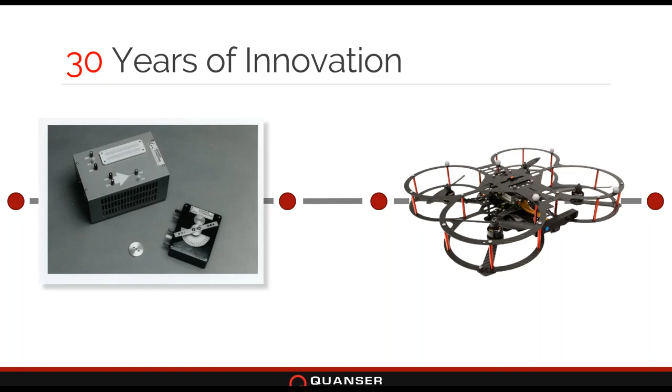One thing I'll also touch on, which we've done over the years and are continuing to do with this product I'll talk about today, is to create systems that take cutting edge technology and really integrate them into solutions that are academically appropriate. So taking whatever it is that industry is pushing, or that even students are pushing, as the next shining light of technology and innovation, and trying to adapt that to the academic field to allow educators to give students the skills they need to use those technologies.

So as I said, many years in academia, we're now closing in on, I think, probably at least 3,000 academic institutions that use our systems around the world. And on our website, we have thousands and thousands of academic papers in research that we've qualified and gathered up that you can search and look through to see how our solutions have addressed your particular fields of interest.

But that being said, there are many more out there. These are just the ones that have come across our desktops, and we have 80 plus core products and solutions. So what we're going to show today is just a little snippet of some of the solutions that we offer, and some representations of the solutions that we offer. But we offer, beyond that, a wide range of products, not just in controls and robotics, which is what we're talking about today, but also in structural health and other types of systems that run the gamut of engineering.

And with that, we'll get right into the final introduction to what we do as a company, which is the Quanser approach. So these are the tenets of what we try to offer with any product, whether it's this type of innovative platform or even just our day-to-day hardware offerings.

We try to make our hardware platforms robust and expandable. I'll say that applies to software and to the solutions that you'll see here, whether it's virtual or real hardware, it's still expandable and it's still robust. And open and transparent - there's nothing hidden away in everything that we do.

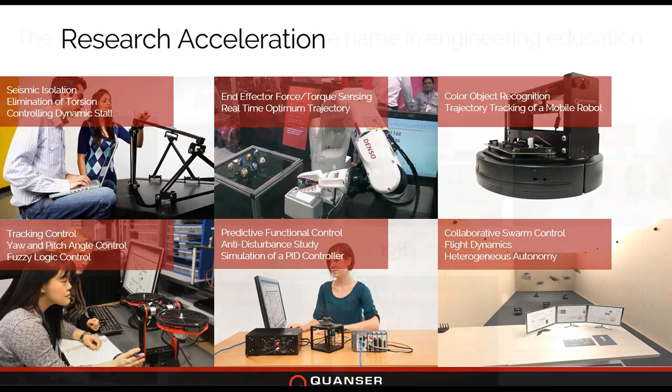One last thing we'll touch on is research. Research is where we started. Everything we do starts with our own internal R&D research. That's why we call our team the R&D team, because before we can present something academically appropriate and ready to use as a teaching tool, we have to do a lot of research to understand it and create something robust, reliable, with the needed capabilities, while offering flexibility so different institutions can use it. These are just some examples of institutions we've partnered with to showcase academically progressive solutions addressing growing needs in the academic field. That doesn't come without a lot of R&D into how we can address not just the technology, but also the needs of students and the academic community.

And now I'll pivot to our legacy in distance education, which is the topic of the day, and obviously the topic of the day for a lot of different groups and organizations around the world.

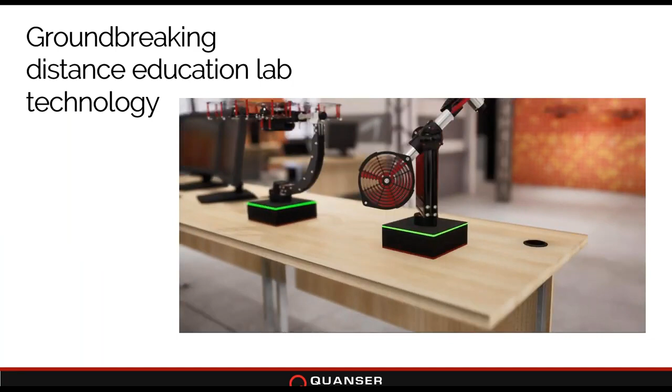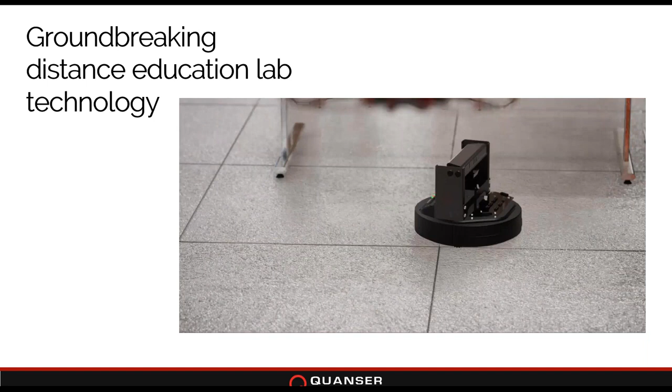This is an example of the technology we've been working on for several years. This is a laboratory experience students could have where they don't just see a video of our systems, but an open environment where they can roam around and see things. We've used this technology to do demonstrations showing how our systems can be used in ambitious ways. But this was basically the furthest we had taken this platform—being able to leverage virtual reality, augmented reality, and mixed reality to showcase our systems. We'd never actually created solutions based around this.

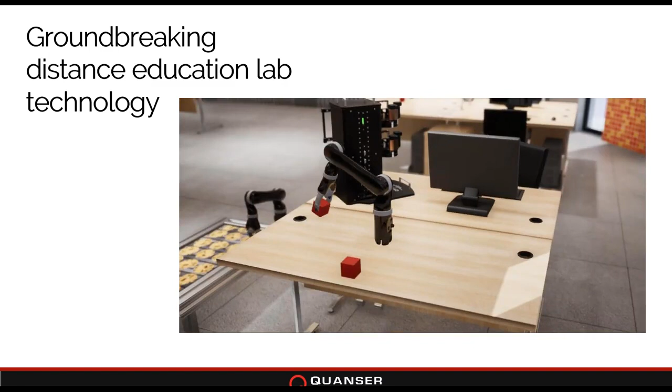That was one of the technologies we pulled on for the solution I'll introduce in a couple of minutes. The other was this platform, qdex, which we've been working on for 6 or 7 years. It took the curriculum side—really interactive, engaging curriculum for students on mobile devices, where they live and breathe. That's where students consume content nowadays. This platform was robust and intuitive, letting students take complex engineering topics and engage with them in a very intuitive way on their mobile devices, whether on the metro, on a plane, walking to class, or in class.

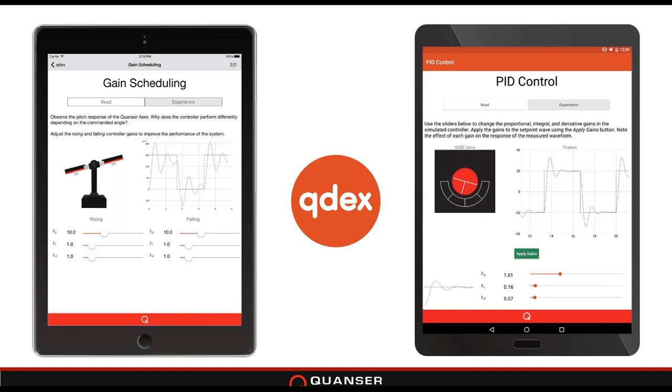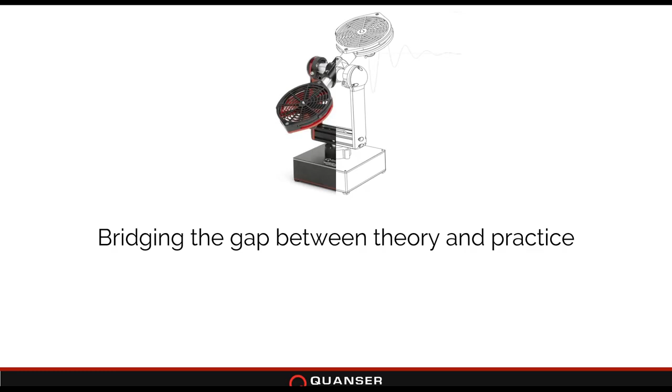So the question was, how do we take those two platforms and create a solution that does what we've always done with our systems through this cutting-edge content delivery mechanism: bridge the gap between theory and practice. How do we keep the theory—we don't want to iron over it or remove it—but also show applications. My team is very passionate about this. Every one of our curriculum topics starts with a motivation section to engage students and show them the point of these concepts, why we're teaching them, and why they're important for the future.

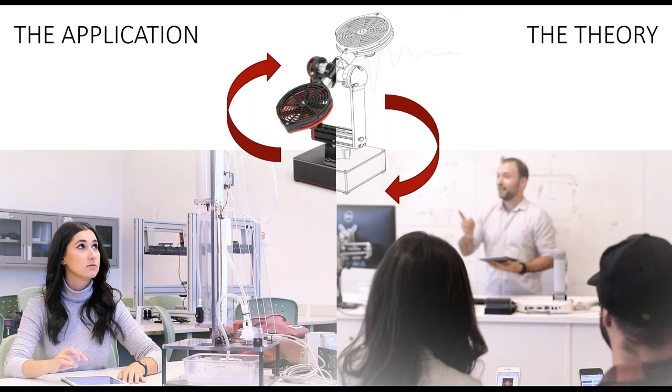So bridging that gap in a really engaging way so that they can really see the reflection of the theory and the application. The last little piece of the equation that we did last year, which you also may have come across, was Experience Controls, which was our mobile textbook that we developed.

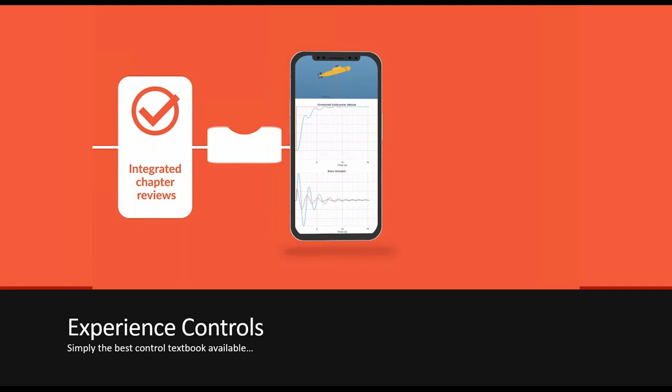Experience Controls was based on our attempt to address what we saw as being an aspect of a controls course that was most in need of enlivenment, most in need of a refresh, which was the textbook. So we took the classic controls textbook topics and tried to build something that would give students exactly those experiences I was just talking about, but with traditional textbook content. It addressed all the classic curriculum topics, and we provided it absolutely free on both iOS and Android, as well as full instructor resources and interactive simulations and everything that students would really expect nowadays out of a real textbook.

And beyond that, what we tried to do with that platform, which has been very successful, I think at the moment we're well over 4,000 student downloads just in the last 8 months, I believe, and 200 or 300 instructor resource downloads. So we showed with that there was a need for this type of technology and for this type of experience for students to be able to engage with these complex topics.

And above all of that, so that's the foundation, the layer on top, as I touched on in the beginning of this presentation, was that ultimately what we always promise our customers is that we will stand by them and we'll drive them towards success.

So that was the trigger, as I started with, that was the impetus for us to take on this challenge of taking those disparate technology foundations, these ideas and concepts that we'd shown with Experience Controls, our legacy in research and teaching, and bring all of that together faster than we've ever created a product before to do something to allow our customers to succeed. And that's what we're going to be talking about today.

With that, I'll just quickly touch on what Paul Gilbert mentioned, which is that this has been a hyper rapid prototyping experience, let's call it. We've gone from an idea to something that we're hopefully going to be launching, I believe this afternoon. Extremely quickly, lots of very long hours, but we're very happy and very excited about what we've created and where this platform will grow and scale to in the future.

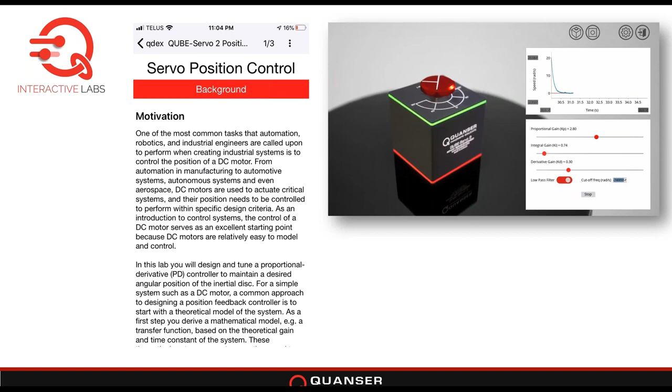So we have everything from simulated encoders producing simulated encoder noise, being able to quantize them and show the effects of those and how filtering can be applied. And then also at the very high level, which is what students really worry about, giving them the ability to interact with their controllers, tune their gains, interact with the system, and see the effects of the different parameters they're playing with.

As you can see, change filter frequency, see how that introduces lag and other effects of interacting with actual hardware. How does hardware affect the theory they would have already understood in their lectures or online resources?

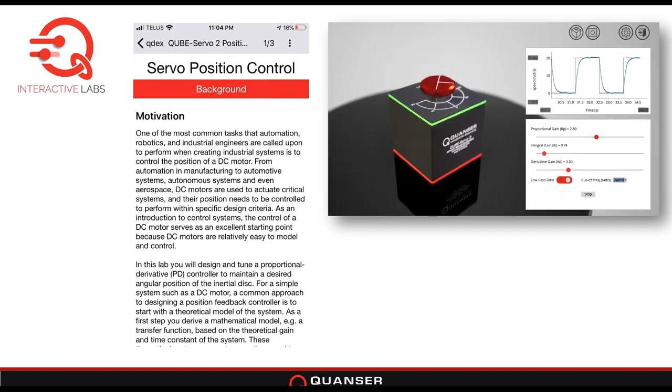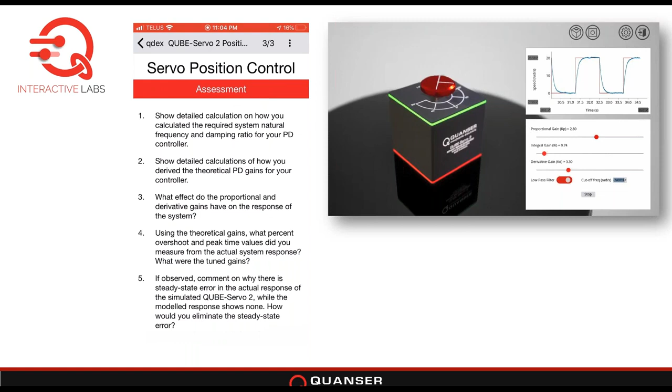On the mobile side, giving that same parity experience of presenting content—the same type of content we've done in Experience Controls for years with our own curriculum—assessment questions to check their understanding, make sure they're following along and understanding the concepts, assessment tools which we hope will later be integrated into a built-in mechanism for creating lab reports.

At the moment, they can just answer the questions and we provide the solutions. But again, interacting with these models of our hardware lets them really understand, on their phone without any need for connectivity or infrastructure, exactly how these systems work. We're trying to give as close as possible an experience that's the same on iOS, Android, Windows, and the actual hardware, so they can be confident that what they're learning is how the actual concepts would be manifest in real systems.

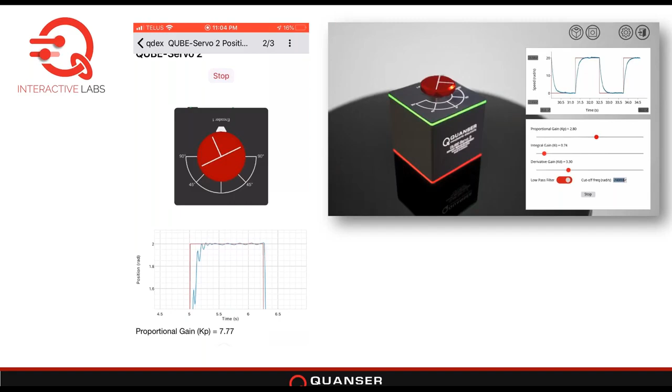So the topics we cover at the moment are on our QUBE-Servo 2, our servo motor: modeling, so experimental testing to find model parameters and comparing those to theoretical first principles models, really showing the difference between a first principles model and an actual physical system, and how the effects of physical systems change how actual systems behave.

Introducing position control, we touch on some of the same aspects as modeling, but more showing them that if you create control gains based on theoretical models and apply them to systems, there's a difference. Those controllers won't work perfectly or have exactly the intended behavior on an actual system, and how you can compensate for that and tune your parameters from there.

That's one of the biggest revelations I've seen from students when teaching at different universities over the years—that realization that if you take a first principles theoretical model, create a controller around it, and apply it to real hardware, it's not going to behave the way you think. So we really wanted to make sure we included that in this experience.

And then a speed control lab, which touches on other aspects of how control affects hardware—how you measure speed, how speed introduces noise into your controller, and how you have to compensate for that. We also have a selection of aerospace control labs based on our Quanser Aero that cover topics like PID tuning.

Again we go back to tuning aspects, dealing more with creating a PID controller, but also understanding the process of qualitative PID control and what the parameters do. So not quite as much emphasis on hardware as with the servo motor, more emphasis on the act of creating control and how the parameters affect the system, which in that case is slightly more complex than the servo motor.

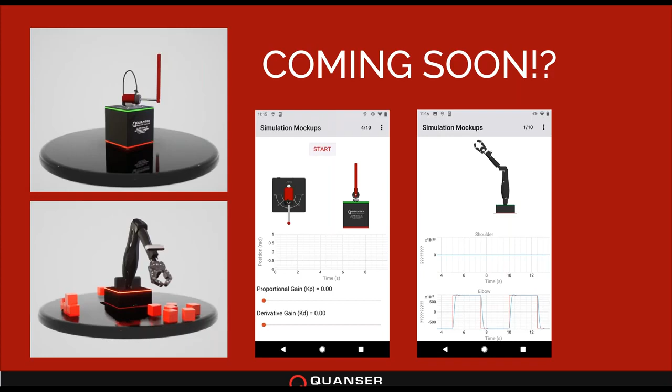And I think probably finally one of the things I want to touch on is why - why did we create these Quanser interactive labs?

As you've heard, we really wanted to provide for the overwhelming requests we've seen. All of our inboxes are full, our phones have been ringing. There's no one at the office, but the phones are ringing with a lot of interest from our partners looking for a solution.

So we wanted to create something that could be implemented today that's scalable to whatever class size is necessary. To do that, we created a solution we could build ourselves, but really offer the same type of experiences, the same type of legacy we've brought to all our products over the last 30 years. We also wanted to leverage what we do—our content delivery, our simulation platforms, our virtualization platforms—things we haven't really showcased before but have been working on for years, to meet not just the current need but the needs that may come in the next few months and years.

We really believe this platform will allow us to create solutions in the future that can address the needs that are coming, not even the needs now, but the needs we may see 6 or 8 months or even years from now. So this platform is not going away. This isn't a short-term thing we've created just to address the current need. This will be a legacy for us, something we'll build on in the years to come.

With that, I'd like to show you some of the experiences we've built over the last few days. I'm going to switch to my phone and show a bit of the actual application platform, and then I'll pass it along to our Director of R&D, Paul Kerim, who will show a bit of the Windows experience. So I'm just going to switch out of the slides to my phone. I hope you can all see my phone with, as I said, my lovely little distractions.

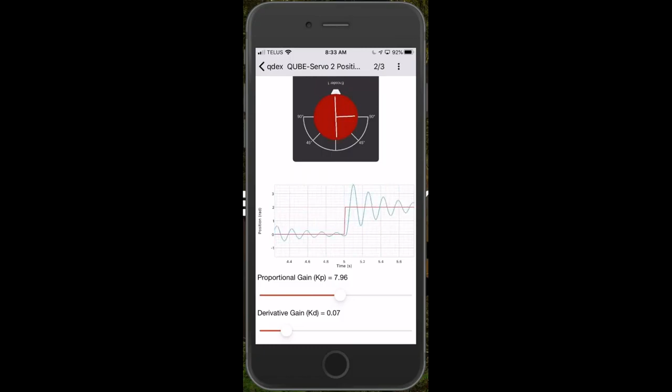And then we get right into the simulation where they can interact with the system, they can tune their parameters, they can see how their parameters affect the actual response of the system, they can zoom in and inspect their responses to get parameters like overshoot and settling time and things like that.

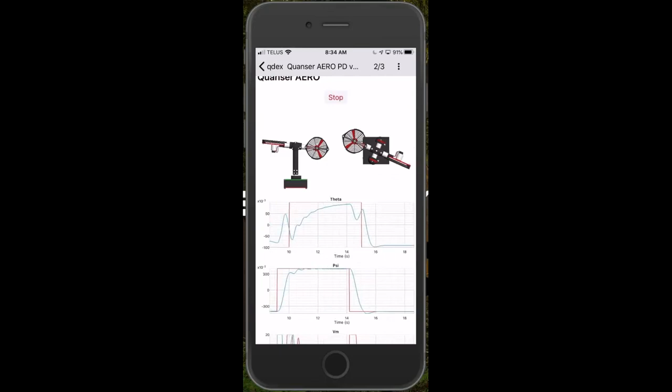And then from there to something a little bit more complex, in terms of PD versus state space. You can see here we've bundled up some of the questions to make it a little bit easier for them to consume the content, but being able to see how difficult it is to tune your parameters in a complex coupled system like this to show how it can respond accurately, but then essentially just flip a switch to something that was designed using an optimal control process and see how nice it is to be able to have that kind of tuned response.

As I said, just play with the systems, just get a feel for them, understand how they work, and understand some of the complexity of them and things like that.

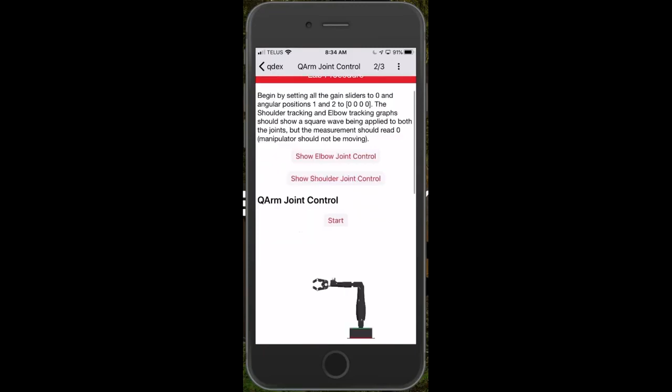This may or may not be available today, but I just wanted to show you a little bit of how this experience will look as well in terms of the QArm and how that sort of interaction will be possible.

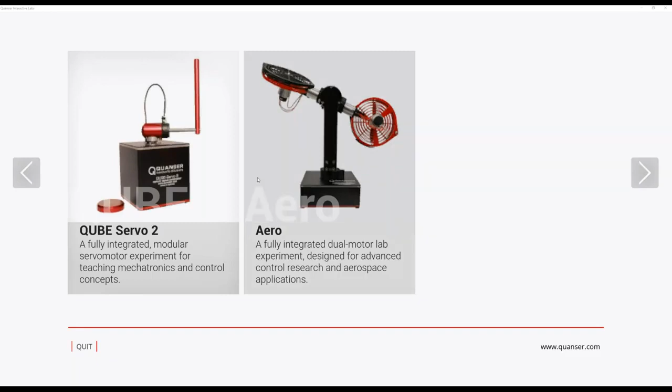And just echoing what everyone's already said, thank Peter and his team a lot. They've put in many long hours and sleepless nights in the last little while, because right off the bat, we've been in this business for 30 years, and we work with many of you for a very long time. And because of where the world is today, all of you are on a need to pivot, to deliver enriched engineering concepts to your students, but they can't come into the lab. That's really where we've always shined, is how to work with you to make that lab experience as phenomenal as possible. And that's where we got together. And although we've had software assets over the years, like Peter has mentioned and shown, we were always looking at the hardware. We truly believe that hands-on hardware experiences is a big part of any engineering experience. Having said that, the world is not where it was just a few months ago, and so a lot of our software and approach to our hardware can be leveraged in this experience.

So what I'm showing you right now is an extension of what Peter showed you, and what we did was quickly look at how we can replicate or leverage our hardware experiences, but deliver them virtually, in a scalable way that tomorrow, the day after, you can send all your students to download an app on their mobile device, to download an application on their Windows or Mac PC, and they can continue, and you can continue to deliver that, quote unquote, hands-on interactive lab experience as seamless as possible. So that was a big part of what we're trying to do, is to make this part of your curricula right now as easy as possible. We know it's a struggle to go online, to deliver lectures remotely.

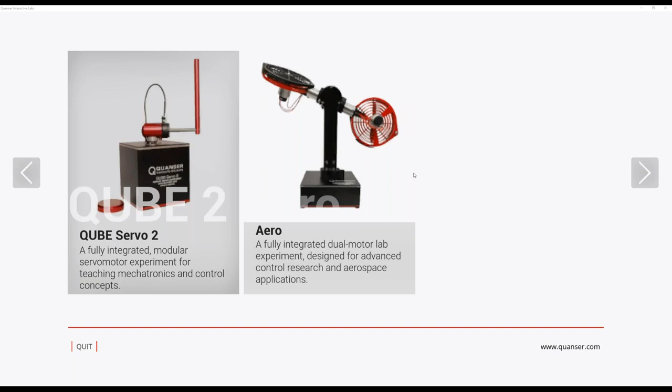We want to work with you to have at least that lab experience be as seamless as we can make it right now. So just to show you what that experience is going to look like, we're going to have multiple Quanser products represented here. So what we did was take the typical lab experience.

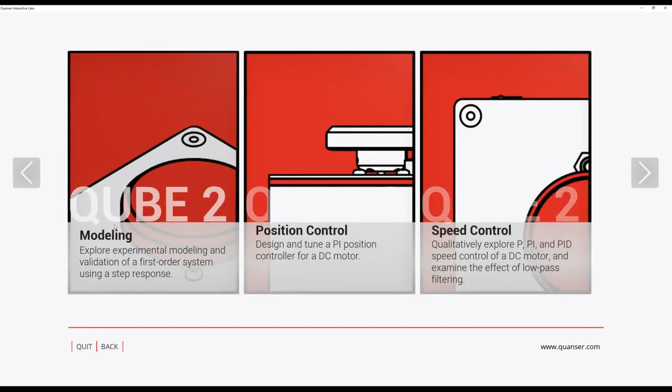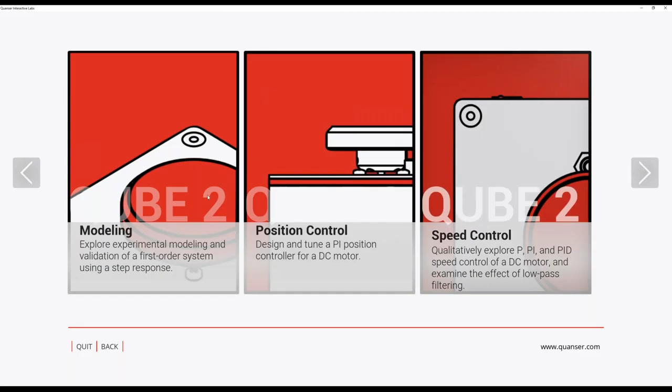For example, in an introductory controls class, you would do things like modeling, and then get into more complicated concepts like how do you control the position of a servo motor, how do you control the speed of a servo motor. So the students here can load up an example, and then pan and zoom around the actual product to see what it's doing, and then, for example, you want to see what the model of the system is.

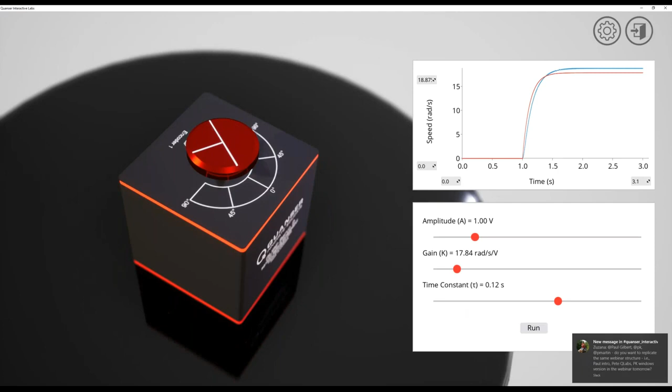The blue represents what the actual system has done. This is a representative, high fidelity model of the actual hardware. Part of this exercise, and there are a lot of lab exercises that go along with this, is to find the right gain and time constant that matches, based on many modeling techniques, the system as closely as possible. So right there, I came fairly close. That's really good.

So that's the modeling lab, and then you can go into some more in-depth ones. A classic exercise is position control, where you can go ahead and look at it, so you can see the plot is mimicking the interaction really well. There's some ringing as it gets there, it does get there and settles to where you want.

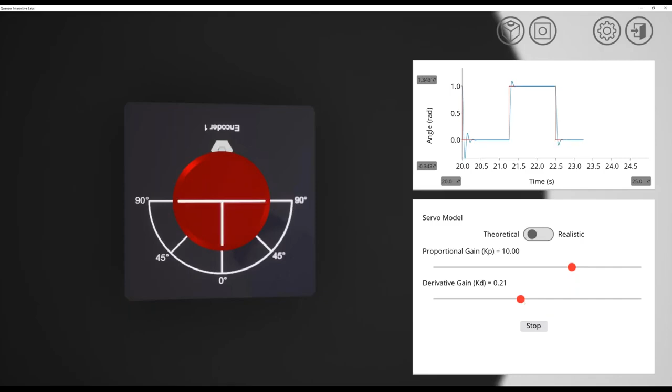But this is the exact same experience you have if you had this servo motor from Quanser right on your desk. I can simply change the gain, add a bit more derivative, and it's getting very, very well tuned. So slow down a bit, but no overshoot, no ringing, and going exactly where we want. These are just typical exercises that we would have with our equipment in the lab.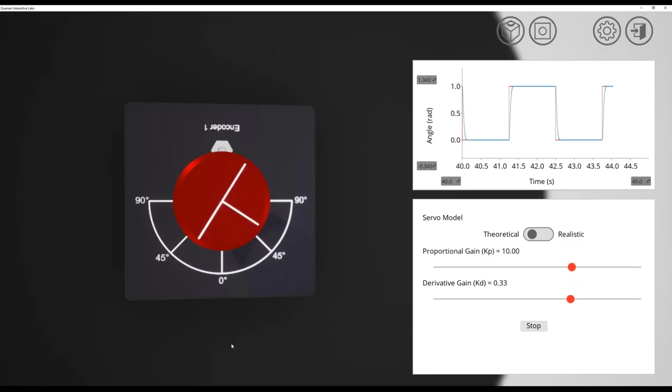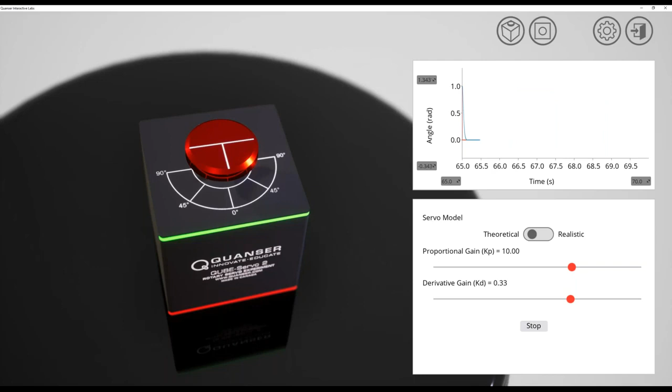We're trying to take those and piecemeal them in a way that they're a lot more accessible in this new approach of digital and all online. And the scalability is definitely there. It's a simple app, you download it from our store. This is the Windows experience. Like Peter was showing you, we have an iOS and Android experience that you can get as well from the app stores. We will be following very closely with the Mac experience as well. So doing as much as we can to allow you to deliver this to a wide variety of students.

And then finally, I will show you the aerospace experiment. This is where you get a bit more involved in terms of the dynamics of the system. The benefit of this system is that, in this configuration at least, it mimics half a quad rotor, which we also have experience with. So you can do a lot of interesting things.

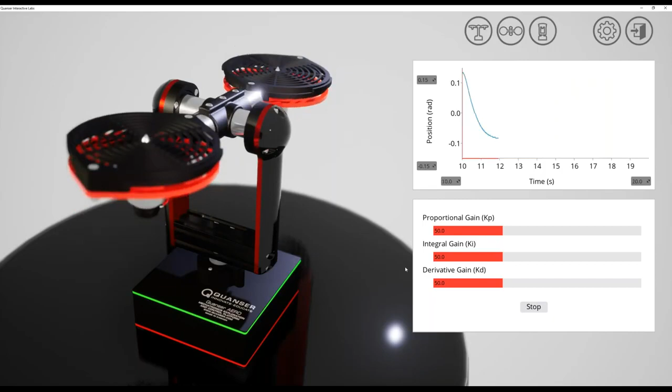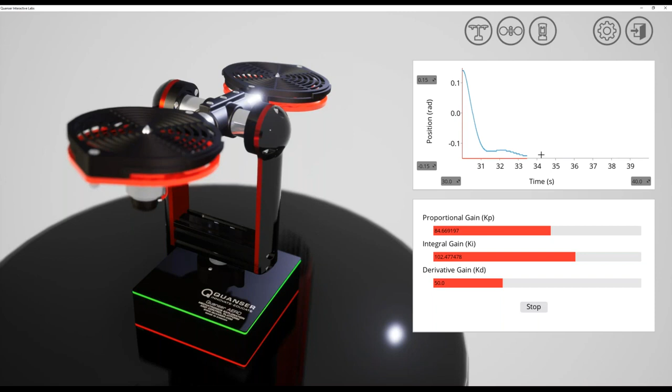You can see it's actually a sluggish motion right now. So I can change its performance, change the gains, and you can see it improves. This is a great way to show what happens with integral gain. If I want something to settle or get to where I want really quickly, increasing integral gain allows me to get to where I want to go in the face of disturbances like gravity, which we've modeled here as well.

These are just very quick exercises that you can walk through, and a lot of the material that you're given in the lab is now translatable to this experience, to get some interactions with quote unquote physical systems. That's really what we're trying to do: provide that typical Quanser experience, but allow you to deliver it virtually and online.

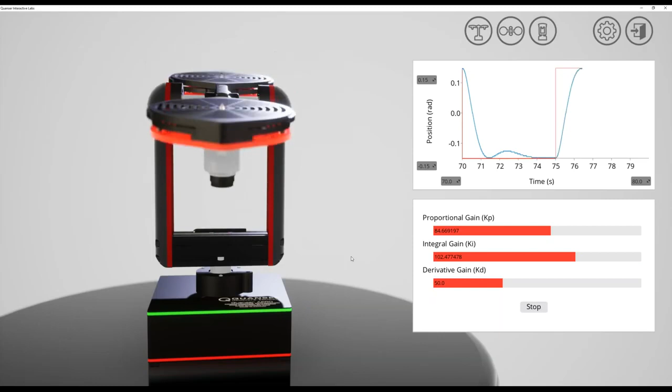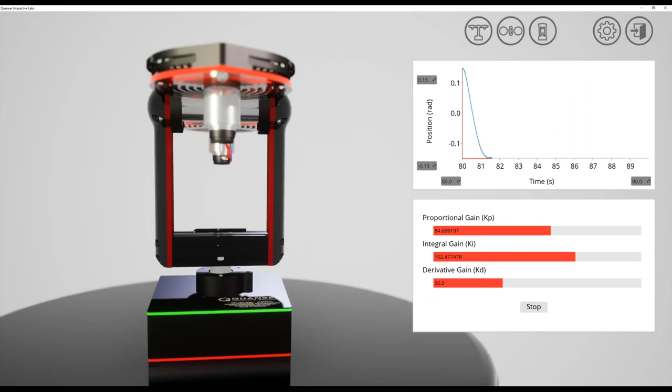So I only have one more thing to note before we wrap this up, which is essentially, again, touching back on what we do as a company, and as Paul Karam said, why we've taken on this challenge. This has always been sort of our legacy. We don't necessarily call the institutions, some of you as well, and also the professors and educators we work with, our customers. They're our partners, and they view us as colleagues, not necessarily directly as vendors.

That's part of our motivation to bring solutions like this and to work as hard as we are on these challenges. We viscerally hear from all of you that you have problems, and we know that we have technology that we can use to solve them. That's why we're doing this, and why we do these ambitious projects, because we want to help and work with you to make sure the solutions we provide are the ones that will work for you and your students. That's where we come from as a company.